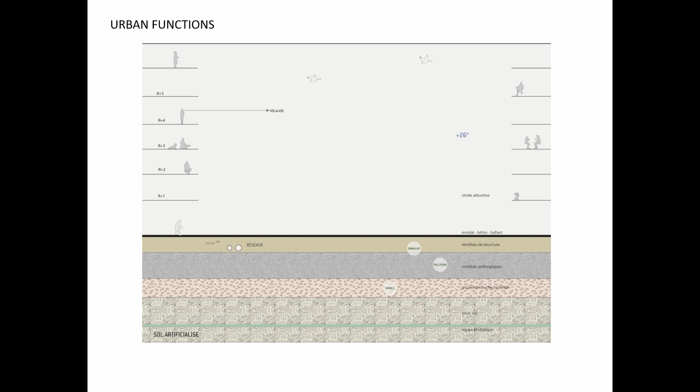So we can start with the neighborhood scale, with the eco-urban metabolism. We have to fight against the crust, the hard surfaces, breaking them, opening them, working with the biodiversity, bringing the biodiversity into such urban neighborhoods with the inhabitants, with the different functions, networks, and bringing a new ecosystemic metabolism, which deals with the underground, not always visible, so many times invisible, with the roots, with the fauna, vegetation, biotopes. We have to bring everyone together: the inhabitants, the mobility, the biodiversity. That's for sure a challenge every time for every one of us.

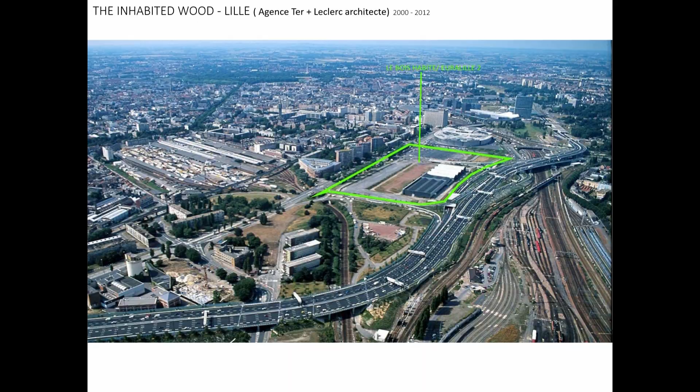Like in this project, the inhabited wood in Lille, we have done it with François Leclerc. It's with the choice, in this very difficult context, very noisy, directly connected to the ring road, to put some buildings around this new neighborhood, the office buildings, in order to bring the calm, to transform it into a quiet place, and reduce drastically the roads with cars, having only one road around these urban systems.

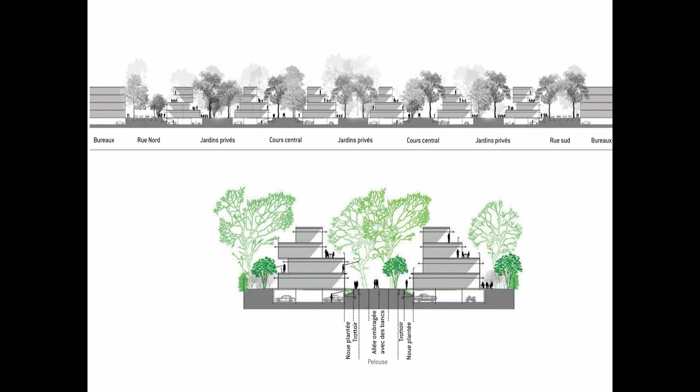That means every one of this architectural band is connected for sure to the road in the surrounding, but on both sides has public green on one side and private green on the other. Public green, that means this is one of the roads, a green road. The firemen can cross it if needed. We can sometimes go there with a car, but usually it's like a park. It's empty, and you have, as inhabitants, a direct contact with the earth, with the grass, with the trees. You have shade, and it's calm, quiet, and on the other side, you have your private garden, your balcony, your terrace. Everyone has contact with open air, with outside, through different surfaces, lifted up or directly on the ground.

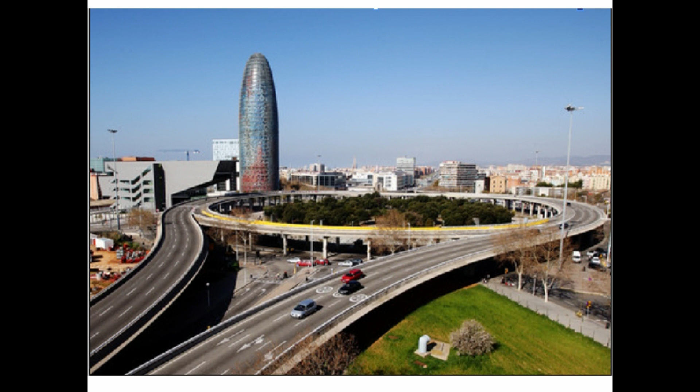Sometimes we have to work in a quite congested urban context, and we are asked to bring an ecology, to bring a kind of biodiversity in this congestion. Marina just spoke about it. In Barcelona, one of the most important places for traffic and mobility along the diagonal, it used to be like a ring, a lifted up motorway, quite noisy.

And disconnecting the different neighborhoods which are all around. The idea, the choice, was to bring there not only an urban plaza, but to bring a kind of biodiversity, a park, an urban park, and at the same time fauna, vegetation, and a park in the middle of the city.

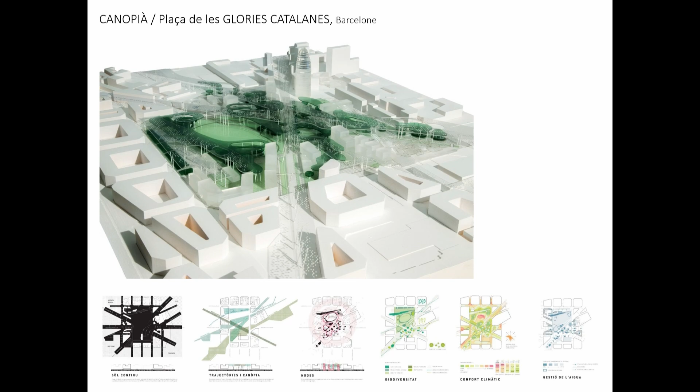So today it's a big site construction, a work in progress, in process, but we can already see some of the places. One, the big green area in the middle is for everyone, and you have as well nodes, ecological nodes, protected areas, earthbound, ecological, not for people, just for fauna, for the ecology, for the birds.

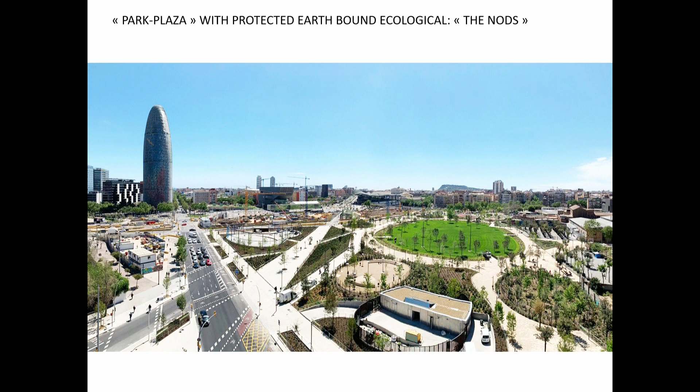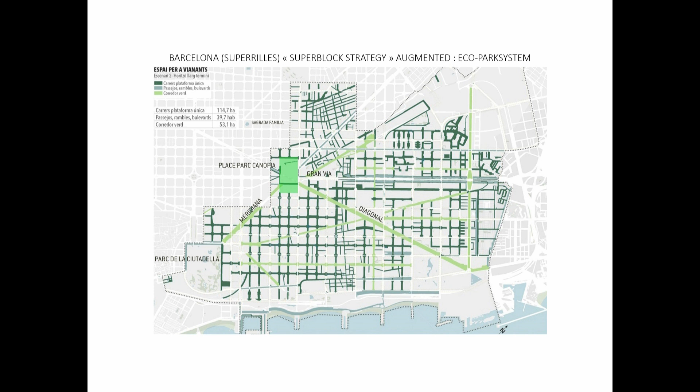This idea is to bring in Barcelona, starting here with those ecological nodes, and step by step, maybe like a virus, but a positive virus, invade the city. Because the city has at the same time a strategy to develop called superblock in English, or superrilles in Barcelona, cancelling many roads to create those superblocks and pedestrian urban spaces, more green axes.

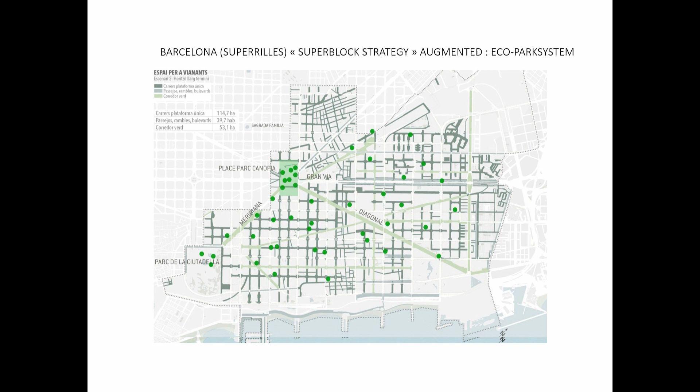And exactly in this pacified urban landscape, we can add some of the nodes which we are developing today in this new central area, Plaza Glòries Catalanes.

A bit the same problem is to solve in Brussels, Place Sainctelette. Here the city doesn't have such a strategy like in Barcelona. Brussels has the idea to bring here culture—it's a cultural challenge. First, bringing in this area a kind of Centre Pompidou, a modern art cultural center, at the same place as the factory, the Citroën factory, which is converted into this kind of museum.

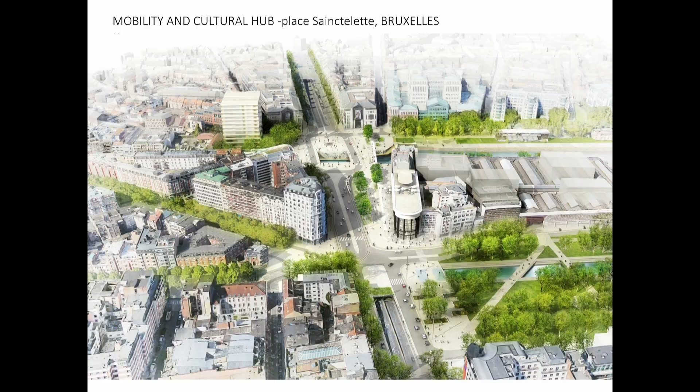And we have at the same time to solve the problem of mobility, the tram, metro, the cars. It's an ongoing project now, re-establishing the plaza connected to this new center, and reconnecting with the canals, with the landscape of Brussels, which is quite beautiful, for example here along the canal.

In Belgium, but in Antwerpen, Anvers in French, the question is the ring. The ring itself, the infrastructure, is dividing the city center from the periphery, and the inhabitants ask strongly, with demonstrations, with really powerful demand, to cover the ring and to develop a new project in order to really connect the city center with the periphery.

We worked on this project for one year with one dedicated place here, to have a dialogue with the inhabitants. We had to provide panels, models, and organize discussions. We were totally free to organize discussions with the inhabitants.

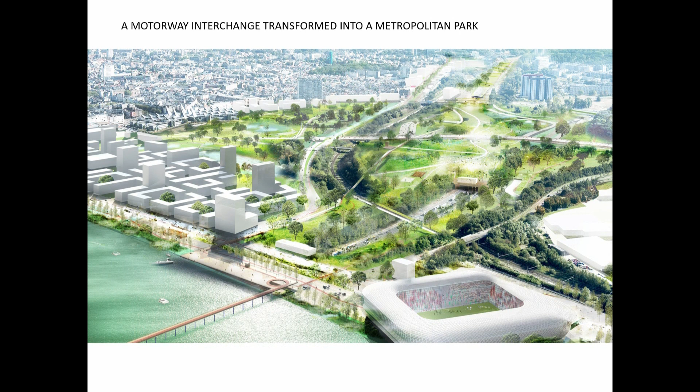The question was, okay, we will cover the ring. We have a huge interchange at the end in the south, connected to the river. We can transform this huge interchange into a big metropolitan park, and then we have to follow the ring. Along the ring, we have to make the choice with the inhabitants: what is the hierarchy, what is the most important thing to reconnect first? We cannot do everything at once. We have to make the choice, and we did it together.

Along this ring, there are several teams working on this. Paola Viganò is one of them, and then we have to reconnect every one of those thoughts.

Another scale is to work at different scales, so at the same time interscalar: river strategies as metropolitan landscape structure, and site-specific project activators at the same time. Big scale and small scale at the same time.

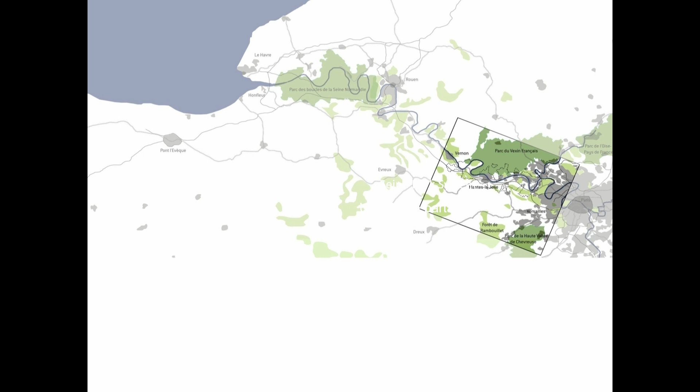For example, here, this is a study called Seine Park, like Emscher Park in Germany—a bit influenced by the German concept of river park. The park means not only a park, but it means thinking together the development of 51 different neighborhoods, municipalities. So how could we take the river as the alibi to put everyone together for one project?

So this is called Seine Park, the river Seine park. We started with the transversal relationships. It's not only the idea to stay along the river, it's not only about the banks. It's about the valley, and we can take the valley of the Impressionists. Many painters made beautiful paintings along this river, but at the same time we have big, huge factories, car factories with horrible neighborhoods.

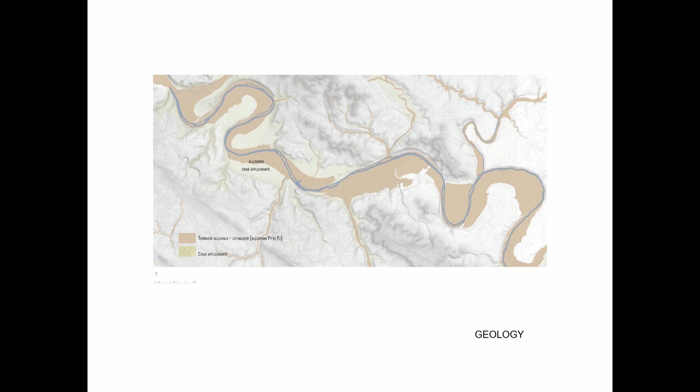So we have to bring them together, really. So starting with this panorama, and then having an analysis about the site, the geology, the history of the site, in order to make it clear where are the urban areas, actual urban areas, and planned extensions, and what could we do for the future?

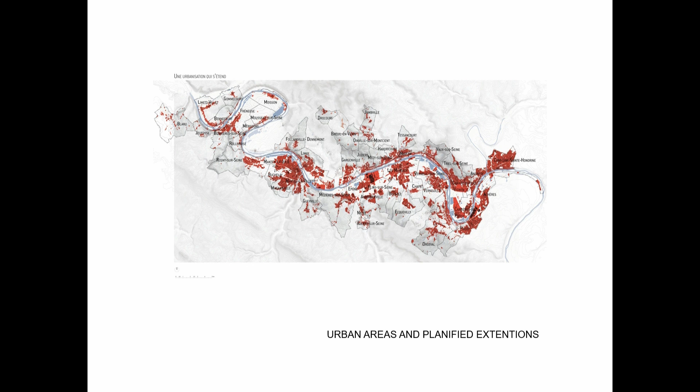Do we have in-between zones still available for landscape? We do have some such sites, such areas. We can protect them, preserve them from urbanization, and find a program for them. So find a development, a landscape development.

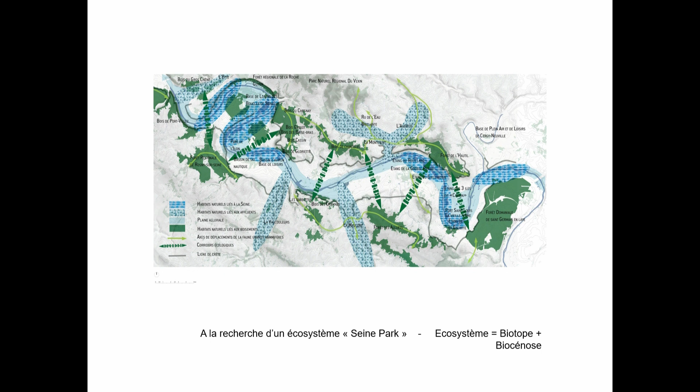The most important thing is for sure to think about it like an ecosystem, a river Seine ecosystem, the biotope and biocenosis together, the vegetation and the fauna. We learned that the fauna is crossing this river, so we need to preserve those corridors, ecological corridors.

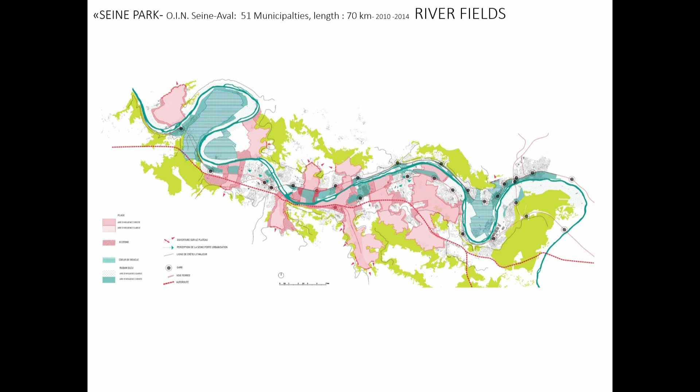In red, you have every one of these corridors, and then we have to negotiate with every one of the mayors of those municipalities.

We organized ateliers, so meetings, big meetings, and the neighborhood has to be constructed together. So everyone is not directly concerned from the beginning about the others, but as soon as they are confronted, as soon as they understand that the perspective he has from his own city, the perspective on the other side of the Seine or the other side of the valley is the other city, so they have to work together.

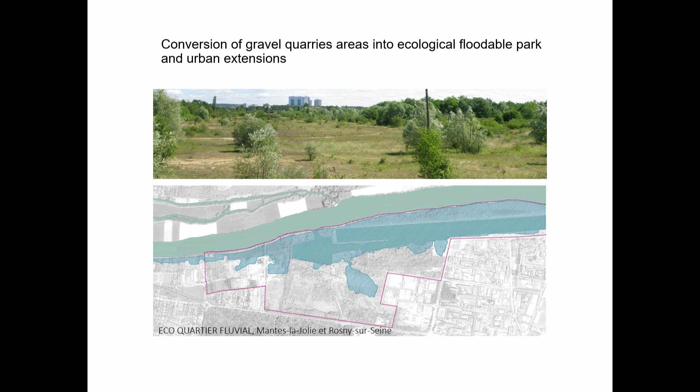And they understood that very fast, working together then to decide how to develop gravel quarries like this one here as an ecological floodable park, and accepting as well urban extensions, half-half.

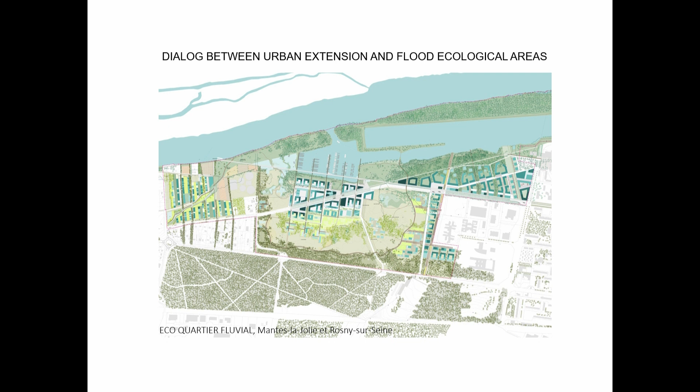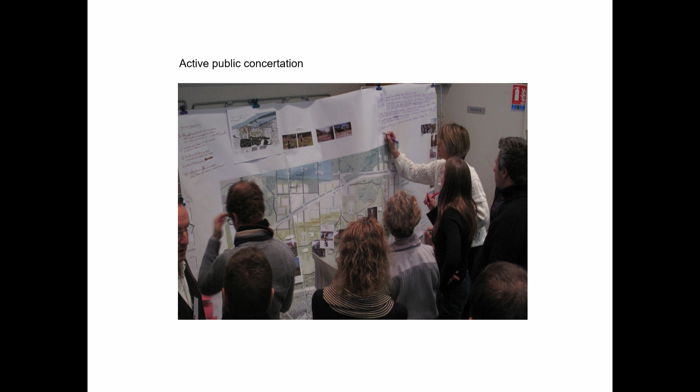So for this, for example, we had to organize it together with the inhabitants. You cannot, for sure, develop urban extension in such a floodable area without them, without the knowledge of the flood, without the impact of the flood, and without the dialogue with the inhabitants, their ideas, their desires. And it was incredibly positive to work with them.

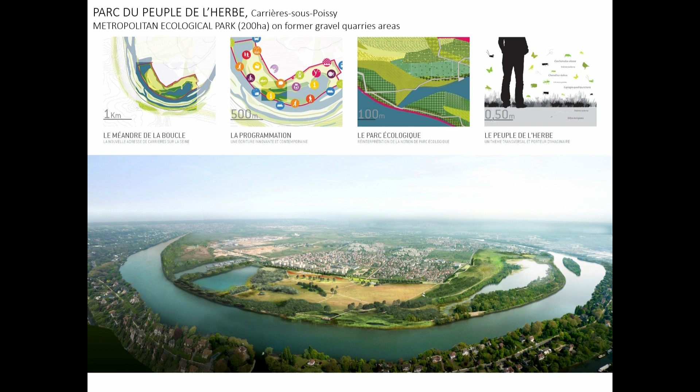And another place along the Seine, we have Carrières-sous-Poissy, a metropolitan ecological park dedicated to birds, insects as well, and the inhabitants were totally in favor of this. And for sure, we have some small places or paths for the inhabitants as well.

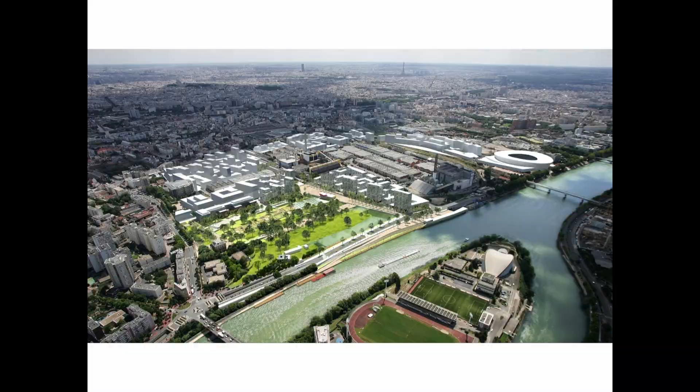And if we are along the Seine, but closer to Paris, we are arriving at another park, an urban park. Here it's Saint-Ouen, a former industrial area, transformed into a big park with social districts, offices, different kinds of diversity of architecture around.

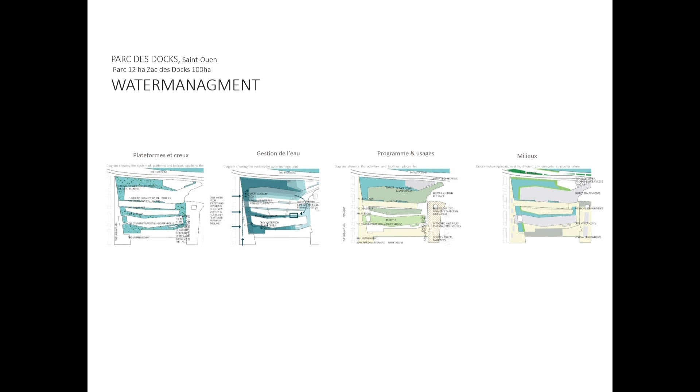We create a new, like a new archipelago with flowing water around it. So this flowing water is bringing a new ecological atmosphere, plantations, life, living ecology in the middle of the city.

But it is bringing as well, in two of those different islands, places to cultivate directly. So associations are cultivating their own gardens here, and it's a way to mix sociology and ecology at the same place in a public park.

And so it's a well-being park with different activities. So it's really a kind of city center, almost without constructions, but with many activities in the park. And this park is cultivated and maintained, partly in an agricultural way, like here, and partly is simply a big panorama with quiet places in the middle.

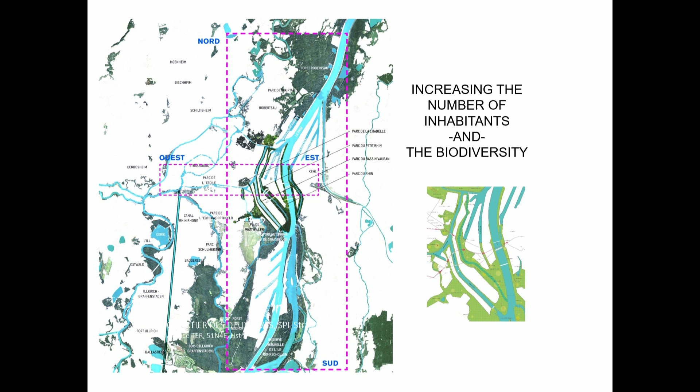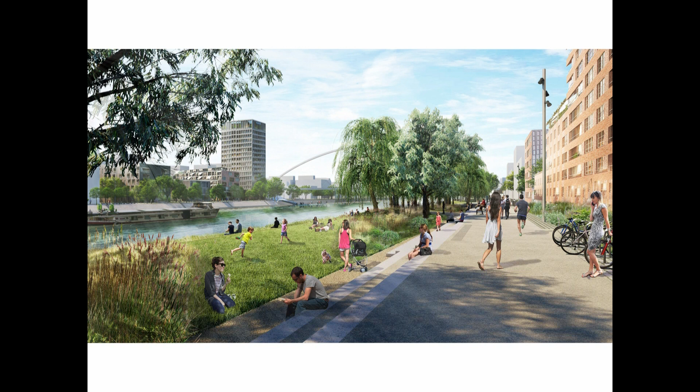And it's even more possible, even easier, if we are not only thinking east-west, the connection between France and Germany, Strasbourg and Kehl, but if we are following the Rhine north-south, connecting the Rhine forest in the north and the other one in the south, creating new corridors across the new district of the Harbor, and the new urban extension, with linear parks along the canals, guiding people through promenades along the Rhine to the forest in the north or in the south.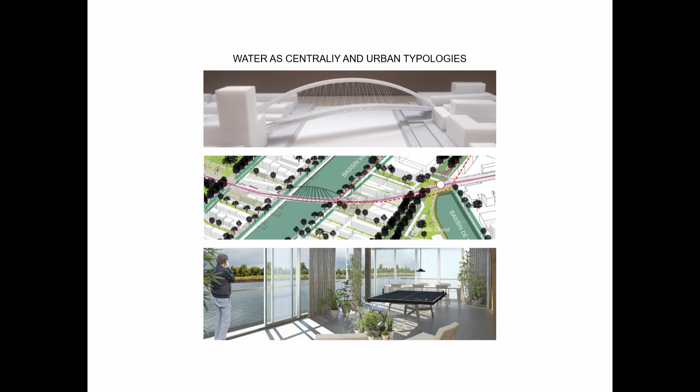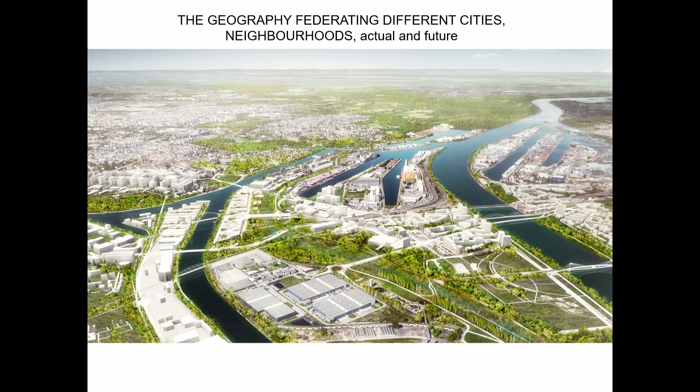And around this, we are organizing urban typologies to increase the density, but this density has a landscape structure, and this landscape structure is really connecting, almost a geographical structure, taking the whole new district on the east, Strasbourg, and Kehl, and on the west, Strasbourg, together along this main valley, the Rhine Valley.

A bit the same idea, but this time it's not a strategy, it's really a project. It has the scale of a strategy, but it is a project. So here in Pudong, in Shanghai, East Bank, we were asked to develop a park 15 miles long, and two years later it's almost done.

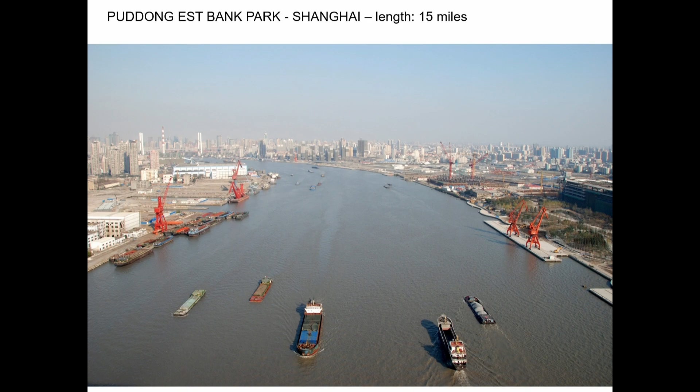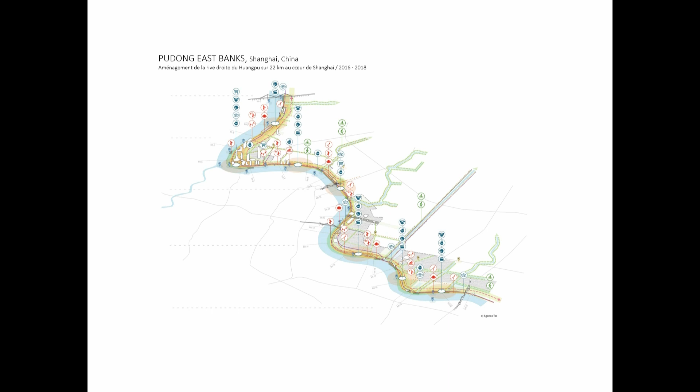So it's not a strategy, you can feel it, you can see it. This park is reconnecting with the whole mobility system actually there in Shanghai, bringing the new possibility to follow the Huangpu River through those existing industrial sites, which are being transformed as soon as the park crosses along the river.

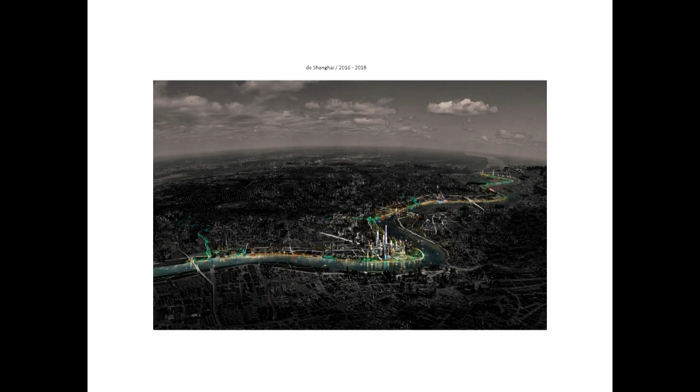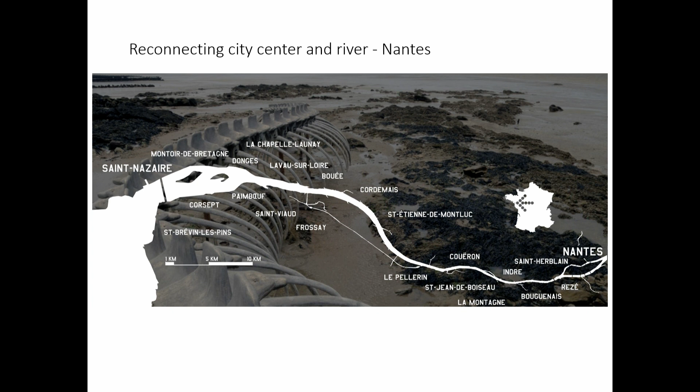And in Nantes, coming back to France, along the river Loire, we are not so far from the estuary. Nantes is a very interesting city with different islands. One is still a big island, but we used to have more islands than today, and more Loire, so river branches, than today. You can see it on the white part, a river branch cancelled years ago.

And what does this area look like? It looks like a big plaza, Place de la Petite Hollande, but in fact it's a big parking lot. One day a week it is a huge market, a metropolitan market. Everyone is coming there to buy things. It's a meeting point for sure, but only one day a week. Otherwise, it's like this, a parking lot.

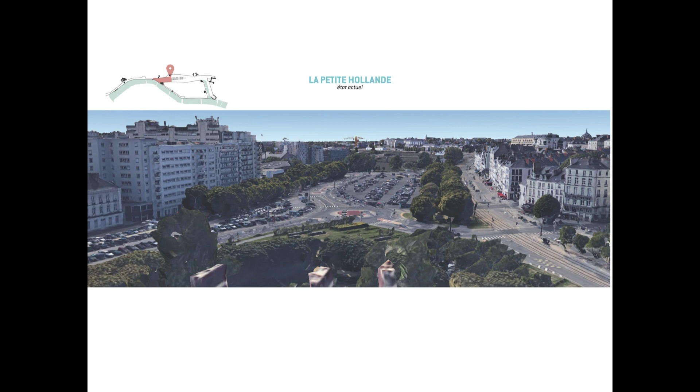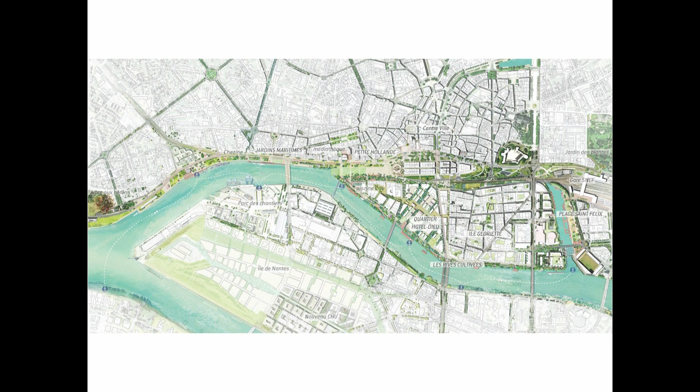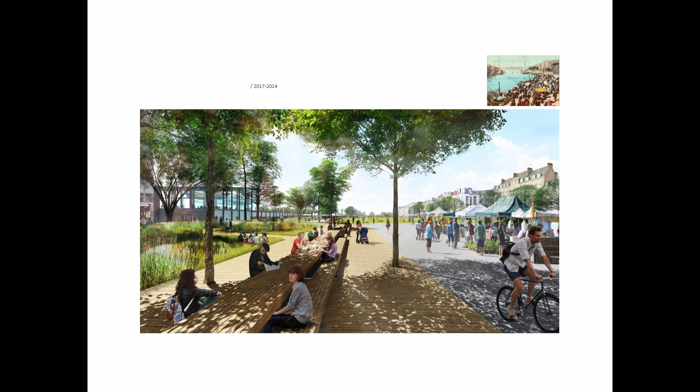The idea here is to keep the market, but not to have the parking lot anymore. The parking lot will be underneath. We will reconnect the different facades programmatically with this huge area, and we will develop along the Loire River a new contact between the city center of Nantes and the river. It was disconnected until now, so we will develop places along the market, big tables to be all together here along the water.

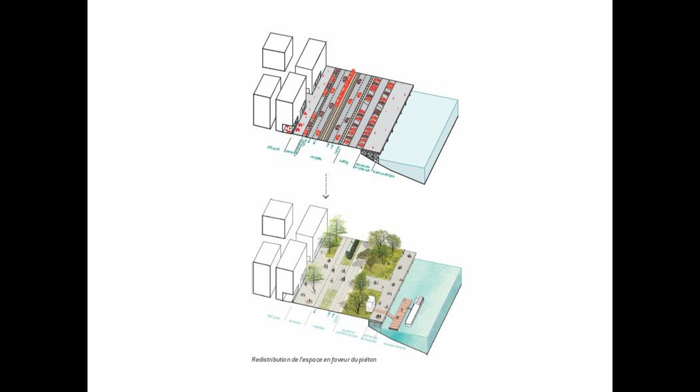And the most difficult thing is the freeway. We don't have a freeway, but we have a speed road along the river, disconnecting the city from its river. In the future we will have cars, but fewer cars than today. We will have the tram everywhere along, and we will cancel the big parking lots in order to create a kind of linear park along the water, with different pontoons and ships, a new activity along the water.

So I am at the end of my presentation. The role of landscape architects in urban and large-scale transformations is essential, in order to integrate the global issues in projects at different scales, as IFLA underlined: climate change, food security and agriculture, community participation in design, health and well-being, indigenous cultures.

In order to do that, for a more integrative approach, for more ecosystemic efficiency, for long-term landscape-led strategies, we need landscape architects as design team leaders, not only subaltern in the team, not only advisors, not only researchers. That's fine, that's perfect, but sometimes we need to be design team leaders, because landscape architecture is really a new mode of urbanism, an integrative mode of urbanism, and for this kind of urbanism we need landscape architects.